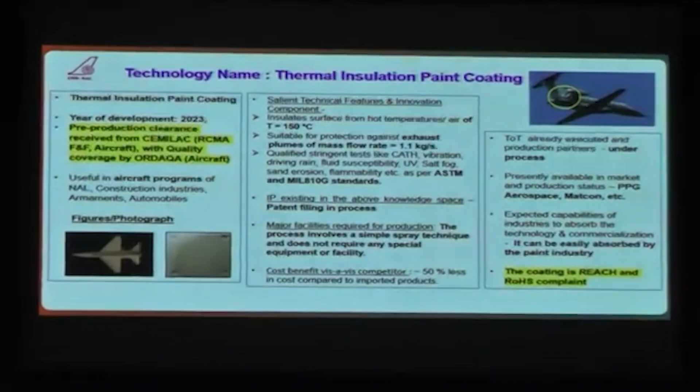Good afternoon, everyone. The technology I shall be discussing now is the thermal insulation paint coating technology. This paint coating technology, developed in 2023, caters to the aircraft's requirement, particularly for providing thermal protection and insulation on aircraft surfaces against impingement of hot air with high mass flow rates.

The motivation for carrying out this activity at CSIR NAL is the requirement in our own in-house program. Our CSIR NAL developed Saras aircraft had a similar issue of undesired heating at the rear fuselage areas, and to address this heating we had to develop a paint which was compatible with the existing paint layers. This paint suits temperatures up to 150 degrees centigrade against hot air of mass flow as high as 1.1 kg per second per stub.

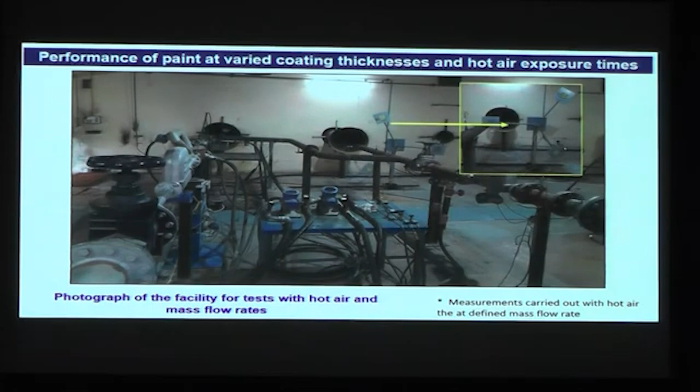The coatings were tested for intactness using C-scan technique, followed by testing for driving rain, salt fog, flammability, sand test, dust, cath, and contamination by 3 different kinds of fluids commonly encountered on aircraft. All these tests were carried out as per relevant military standards, RTCA and ASTM standards.

Further to this, the coatings were also tested for mechanical durability, for intactness towards vibration test and also pull-off adhesion test. Adhesion is a very, very important factor for these coatings on the aircraft to have long service life, so in the next slide I shall detail you a little on that.

Further, the coatings were also highly stable against thermal tests which were carried out, including thermal shock, thermal stability and thermal cycles up to greater than 8,000 cycles.

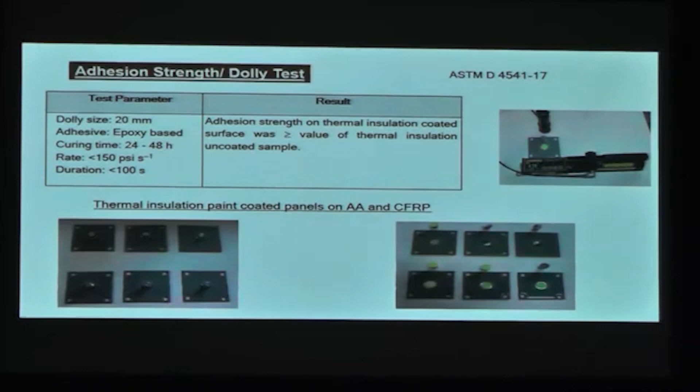The tests were carried out as per the standard, and it was seen that the adhesion strength of the coated samples was much higher than the regularly seen values for normal samples. So these coatings had very good pull-off strength compared to the regular coated samples.

All of the tests listed in the previous slide were carried out in NABL accredited laboratories and witnessed by inspectors from the certifying agencies.

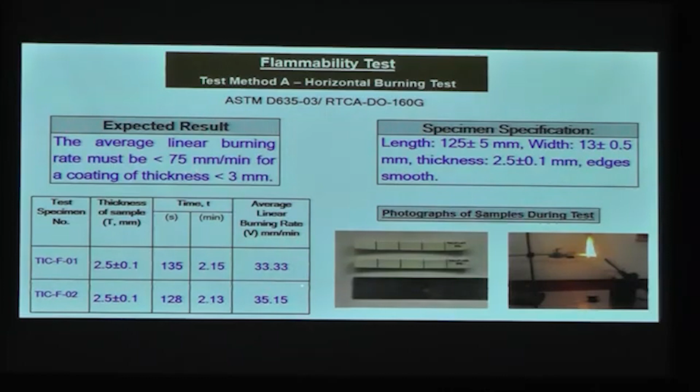This was also a very important test which we had to do, wherein we carried out the flammability test using the horizontal burning test method. As per the requirement, the coating had to have a linear burning rate less than 75 mm per minute, and we see that the developed coatings had almost half of what was actually required. Therefore, the coatings also qualified this test.

So the salient features of the thermal insulation paint in brief: this paint is suitable for applications providing thermal insulation against hot air for temperatures up to 150 to 180 degrees centigrade. The density of the coating is very low, about 0.85 gram per cc.

The paint is developed using locally available raw materials. The deposition technique is also very simple and doesn't need any sophisticated machineries. Hence, it can be easily adopted into the industries.

Since the method of deposition is a simple spray technique which can be carried out at room temperature, there is a lot of ease in controlling the coating thickness and also in deposition of the paint on complex shapes. Since it is a spray technique, it is also possible to carry out local repairs on site.

It is non-combustible with extremely low flame spread. It is suitable for metal, concrete and composite, because this paint has been proved on both aircraft grade aluminium alloys as well as carbon composites. The paint is compatible with epoxy as well as PU paint. No additional waterproofing is required, and it is resistant to regular wear and tear.

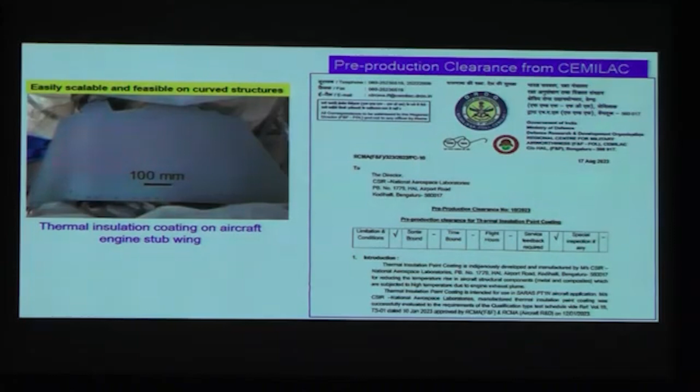The paint has been accorded pre-production clearance by CEMILAC in August 2023, and we have taken up activity to put it on the aircraft and see its behavior. This technology is available for TOT. Thank you.

This chromic acid anodization is conventionally used because of its high corrosion protection, and it has very good adhesion to the primer, and it leads to minimal reduction in fatigue strength. But unfortunately, the hexavalent chromium used in the development of this chromic acid anodization is highly carcinogenic and toxic, and it has to be phased out at the earliest.

According to one of the forecasts, a likely sunset date for this hexavalent chromium containing chromic acid anodization is 2026. So the need of the hour is to develop an alternative anodization process which will give performance equivalent to that of the conventional chromic acid anodization.

So people have been trying throughout the world, finding out a suitable alternative anodization. For example, sulfuric acid anodization, boric sulfuric acid anodization, or tartaric sulfuric acid anodization. These are the alternatives that have been envisaged. But most of the time, due to lack of enough corrosion protection, they are usually sealed with hexavalent chromium containing sealant, which is again undesirable.

Keeping that in mind, we have developed at NAL an alternative process, which is a modified tartaric sulfuric acid anodization, and we have sealed it with an eco-friendly chromate-free formulation. We have evaluated this alternative coating for a variety of tests. For example, it is qualified as per MIL-A-8625F, which is generally the standard used for the evaluation of even the chromic acid anodization.

First and foremost, it was tested for corrosion through conventional salt spray testing, evaluated per ASTM B117, and it qualifies for more than 2,000 hours, at par with conventional chromic acid anodization.

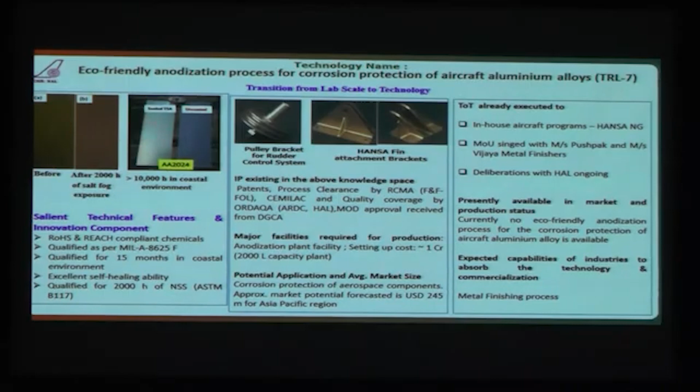The second eco-friendly technology I would be talking about is the zinc-nickel process. It has been developed as an alternative to cadmium. Cadmium coatings are generally used for corrosion protection of high-strength steels because of their excellent corrosion resistance, providing protection through sacrificial coating.

It has a very low coefficient of friction, meaning high lubricity, and does not result in any reduction in tensile or fatigue strength. But unfortunately, it is toxic and carcinogenic because we use cadmium in the process. There is also cyanide and hexavalent chromium in the process—all three entities are very carcinogenic and have to be limited.

So we have developed an alternative process, the zinc-nickel process, and it has been evaluated extensively as per AMS standards, with thickness in the range of 10 to 14 microns.

It has been evaluated for adhesion through the scratch test and the bend test. There is no peel off of the coating, and its compatibility with the primer and PU has been established.

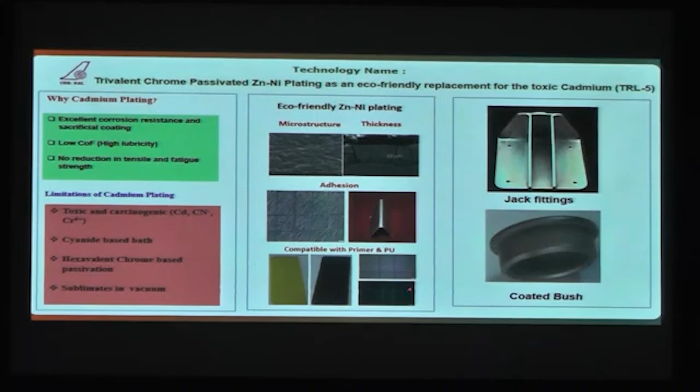This is the setup we have developed, a 500 liter facility for production of zinc-nickel coatings. These are some of the salient features: the thickness is in the range of 15 to 18 microns, and the corrosion resistance is more than 500 hours of salt spray without any red rust formation, as required by AMS 2417J.

Adhesion is excellent, evaluated as per this standard, and it has qualified for more than 200 hours of hydrogen embrittlement test, with lubricity comparable to cadmium.

We have obtained pre-production approval from RCMA CEMILAC very recently, and we are going for airworthiness certification next, which we'll likely get within about 6 months. The costing is at par with cadmium even for this zinc-nickel process.

Wherever high strength steels are used, we can use this for corrosion protection as a replacement for cadmium. Post airworthiness approval, the technology will potentially be transferred to the aerospace industry. If anyone is interested, they can take up this technology as an alternative for cadmium.

There are no technologies as such in India currently as a replacement for cadmium—it's one of a kind. I strongly believe this can completely eliminate cadmium in corrosion protection applications. Thank you.

As you see, the gas turbine engines have different temperature zones, ranging from 300 to 400 degrees at the inlet to up to 1200 degrees centigrade at the outlet. So we have developed different coatings for different components, such as thermal barrier coatings for turbine engines, environmental barrier coatings for composite components, and erosion resistance coatings mainly for compressor components.

We have various IP patents in this area. The salient features are these TBCs are compatible for high working temperatures of 1100 to 1200 degree centigrade, and you can achieve up to a 120 degree centigrade temperature drop so as to protect the bare metal from the very hot zone. It has very good thermal durability and low erosion rate.

Our EBC coating, that is environmental barrier coating, meant for composite components, has moisture resistance and also very good thermal durability. The other coating is erosion resistant coating for our compressor blades.

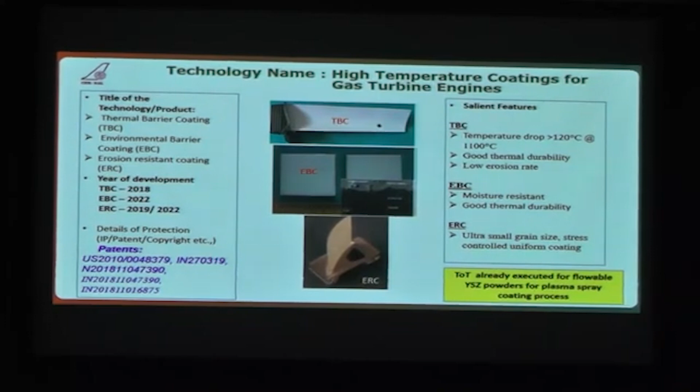These are all made by sputter coating techniques, which give a very good ultra small grain size, stress controlled uniform coatings, with both ductile and brittle balanced nature. We have also transferred technology based on this.

For plasma spray coatings, whatever powder is required has to be flowable. We have made those flowable powders by our own indigenous process, spray drying, and this process has been patented and also transferred to industry.

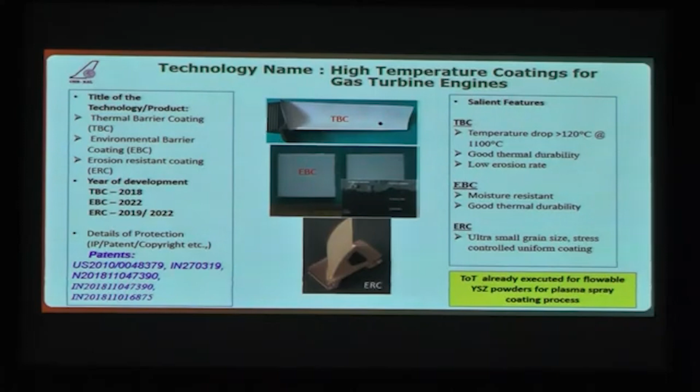As you are aware, in gas turbines there are many degradation issues in the typical components, ranging from hot corrosion, erosion, and CMAS attack. The CMAS attack is like volcanic ash, consisting of calcium, magnesium, aluminosilicates, which can react with these components and degrade your turbine blade components.

These gas turbines have a range of temperature zones, from 350 to 400 degrees centigrade up to 1200 degrees centigrade. So we are developing different types of coatings for these components, one among them being the thermal barrier coating.

Our basic strength is that we have all the inherent requirements for the coating process, like plasma spray facilities and sputter coating facilities. We have state-of-the-art characterization facilities for these coatings, like thermal cycling, and there is a unique facility which you can find only at NAL, like this combustor rig test facility, where you can test these coatings in typical gas turbine conditions with simulated mass flow and pressure conditions.

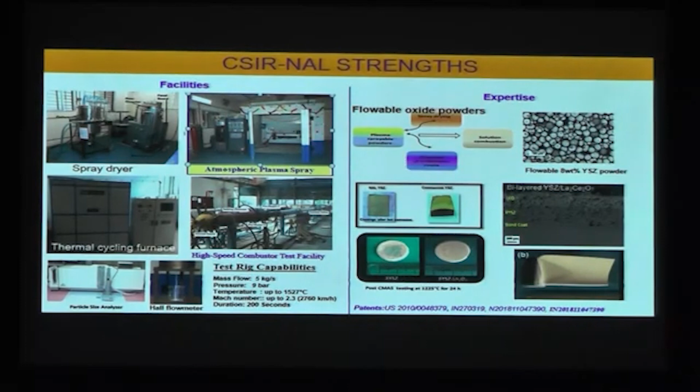These coatings are tested for typical aerospace conditions and undergo all sorts of stringent testing in our test rig. We have made a wide range of thermal barrier compositions, ranging from doped yttria stabilized zirconia, ytterbium doped zirconiates, and Gadolinium pyrochlore, among others.

The uniqueness of these coatings is that they have very low thermal conductivity, which is one of the important properties for thermal barrier coatings. It's worth mentioning our thermal conductivity is in the range of 0.5 to 1 watt per meter Kelvin, whereas commercial YSZ coatings are about 2 watts per meter Kelvin. We have tested for thermal cycling and have achieved more than 100 thermal cycles in these coatings, and our erosion rates are one order of magnitude lower than commercial coatings.

The other one is environmental barrier coatings. In next gen engines, people are also using SiC composite components in aircraft engines. This requires a different type of coating, because the corrosion problem is altogether different compared to metal-based components. At high temperature, in the presence of water gas, this SiC matrix will degrade over time by hydrolysis. Further, a different type of coating has evolved.

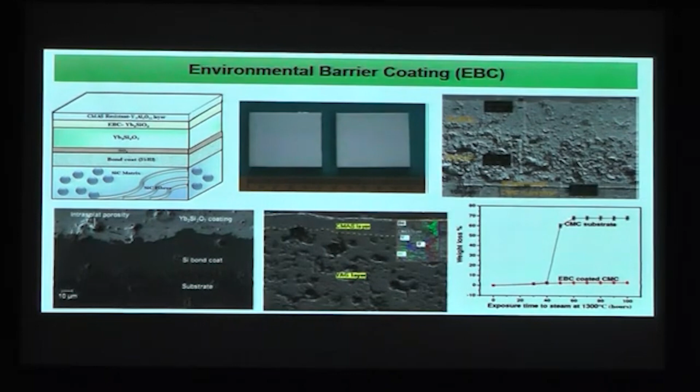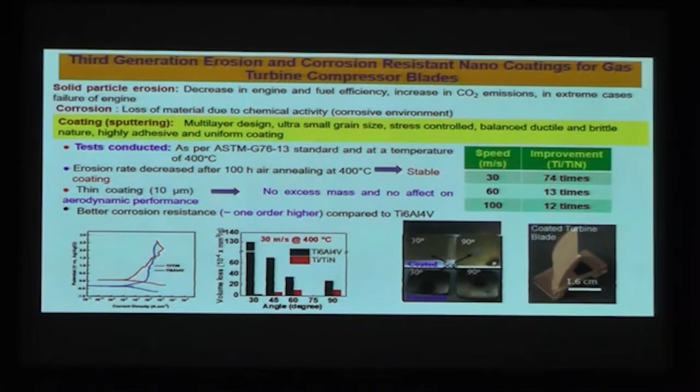Further to that, we have also come out with nanoporous based coatings. The uniqueness of this coating is that it can absorb the erodent energy to some extent, and by that way it improves erosion resistance. In this case, we have realized about 18 times higher erosion resistance than the bare titanium alloy substrates. So with this, these coatings have the ability to withstand high temperature, erosion resistance, and corrosion resistance.

Not only in aerospace applications, it can also be used for many industrial and automobile applications. For example, this same plasma spray coating process has been used for our fuel cell coatings, that is for coating the spinel oxide on metallic substrates, on a stainless steel substrate, where the requirement is slightly different. So what I want to mention here is this is not just aerospace, it has many applications. If any industrial partners come forward, we are ready to customize these coatings as per their requirement.

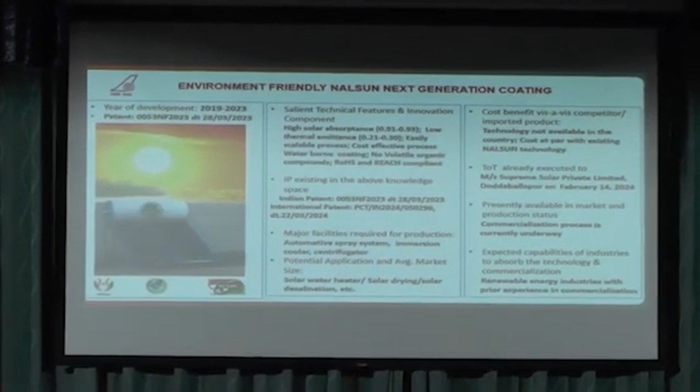Let me start with a brief introduction on why we have developed this environmentally friendly NALSUN next generation coating technology for solar water heater applications. In the late 1980s, NAL developed NALSUN spectrally selective coating for solar water heater applications, and the technology has been transferred to 29 industries. However, this coating is an electrodeposited black chrome coating, and it contains hexavalent chrome, which is carcinogenic, and its disposal is a challenge. Hence many industries approached us to develop an eco-friendly and easily scalable coating technology, which at the time was not available in the country.

Towards this, we developed this NALSUN next generation coating technology, which is cost effective, easily scalable, and the major advantage is that it is completely environmentally friendly. During the period of 2019 to 2023, we developed this coating, and the major advantage is that it has very high solar absorptance and very low thermal emittance, meaning it can absorb solar energy and convert it into thermal energy at a very high rate. One of the major advantages is that we have not used any volatile organic compounds, and it is completely environmentally friendly, and it is ROHS and REACH compliant. The coating concept has been protected under an Indian patent and also an international patent, and a trademark is filed under the name NALSUN NG.

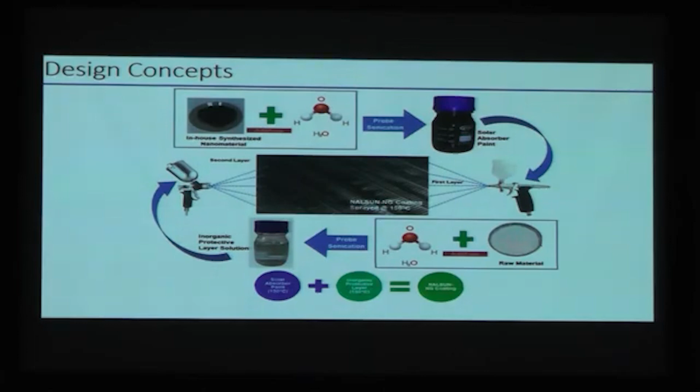With these spectrally selective coatings, we achieved absorptance of almost 93% and emittance in the range of 30%. The coating also has very high thermal stability up to 175 degrees Celsius for 600 hours, and the optical properties of these coatings almost match our existing NALSUN coating technology.

To utilize this coating for practical applications, it has to qualify various environmental tests, including humidity test, condensation, and corrosion resistance tests. All these tests were carried out under ASTM and International Energy Agency standards. We have tested these coatings at NABL accredited labs, third-party agencies, who have evaluated and provided the certificate.

The two major tests are the ROHS test and the REACH test. These two tests give you an idea whether any hazardous chemicals are present in your coating. This test has been done at TUV Rheinland, and they have provided that the coatings are ROHS and REACH compliant. The ROHS test clearly shows that there are no heavy metals, phenyl compounds, or phthalates present in the coating.

The REACH test is very crucial, having 223 substances of very high concern. Even if you are simply using acetone in the coating, it will not qualify the REACH test. This clearly shows that we have mainly used all inorganic materials to get this technology.

As I mentioned before, we have used mainly water as a solvent, so this coating has qualified the VOC test. For the corrosion resistant test, which mainly uses sulfur dioxide gas, this test facility is not available in the country. So we sent the samples to TUV Rheinland, Germany, and the coating has qualified this test.

The major test is the conversion efficiency test, which measures how much our coating is absorbing the solar energy and converting it into thermal energy. To do this test, we prepared a solar water heater panel with the help of private industries, and this panel was sent to Regional Solar Energy Testing Center, Madurai. They tested this coating for almost 2 months and provided a certificate.

That is pointer. Yeah, okay. Good afternoon to one and all present here. So now I'm going to give a brief presentation on two technologies.

One is basically the continuous fiber reinforced ceramic matrix composites through CVI technology, chemical vapor infiltration technology. It is one of the gas phase processes where we can convert the preform into a final product for various applications. The salient feature of this technology is that the temperature and pressure involved is very low, so it doesn't damage your reinforcement. And the reinforcement can be anything, like carbon fiber.

I think my friend Dr. Tarun is going to address that. We can also use the silicon carbide fiber or oxide fiber, so any fiber can work as a reinforcement. And at low temperature itself, I can get the phase which we wanted in the CVI. Another thing is their strength-to-weight ratio is very good.

Because of the low density and high Young's modulus. So the products which we have already made using this CVI technology, you can see here.

The centermost is the aircraft brake disc application, where we take carbon fiber as reinforcement and process it through CVI, and finally we get the product. Similarly, a lot of gas turbine engine based applications, gas turbine exit nozzle side, especially the convergent flap sleeve, and also some applications like hypersonic cruise missile applications, especially the wing leading edge and nose tip and so on.

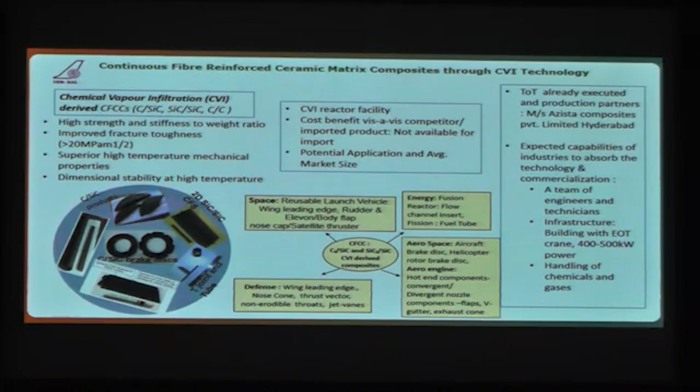So CVI is nothing but a chemical vapor infiltration process, where we bring gaseous reactants and allow them to infiltrate the heated porous preform and react at high temperature and low pressure, forming a refractory solid. If you keep doing this, the whole porous preform will be converted into a tough composite.

Typically about 300 to 400 hours of infiltration is required to get almost 88 to 90% of theoretical density.

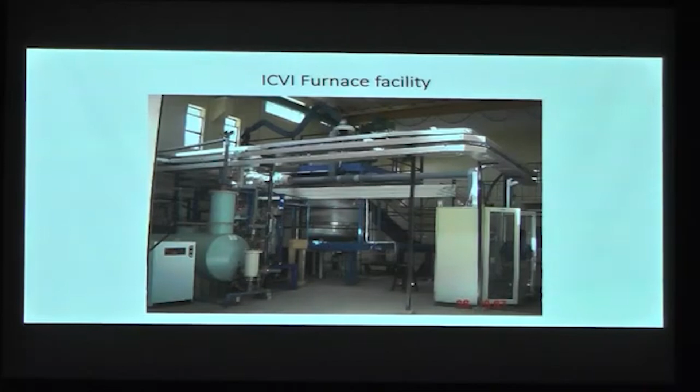First we go for the interface coating by cracking methane, which gives pyrolytic carbon. In some cases boron nitride can also be used, where BCl3 and ammonia react to form boron nitride. Finally the matrix CVI is done by taking methyl trichlorosilane, which is decomposed at high temperature to get silicon carbide.

So this is with respect to the first technology. These are all the components which we have developed.

The second technology - so far whatever I explained, the CVI, it is a time consuming process, 300, 400 hours. So now how to reduce the time? To reduce the time, we have taken up a process called the hybrid process, where we want to complement CVI with other processes like polymer impregnation and pyrolysis, and also liquid silicon infiltration process. Thereby we can reduce the processing time by something like 40% to 50%. So that is how we have taken up this project.

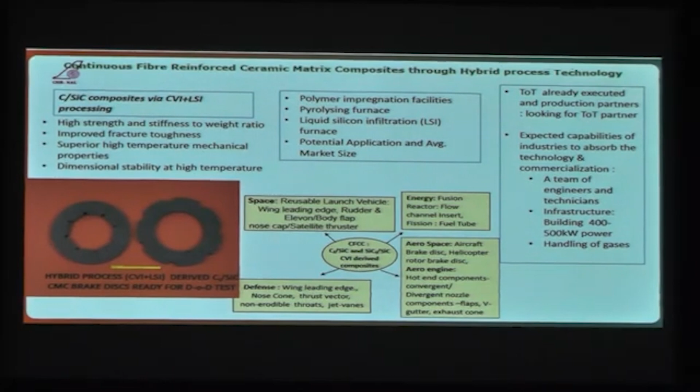Application wise is the same, and the company should have the furnace and also polymer impregnation facilities, like RTM or vacuum bagging technique. So any polymer composite, that is one intermediate step, they should have it. And of course they should also have the binder pyrolysing furnace, and also liquid silicon infiltration. Application is the same, it finds everything.

So you all know the brake disc, starting from metal to CC, carbon-carbon composite. Now recently, 4 or 5 years back, the consortium met by the international community, where the Aircraft Brake Disc Manufacturers Association declared that C-SiC composite is the next generation aircraft brake disc material, like a fourth gen material.

So the advantage compared to CC is very good. Almost all commercial aircraft today is flying with carbon-carbon, no problem. But there are some disadvantages, like instability in friction performance, the coefficient of friction, and also the proneness to oxidation. Since the matrix is carbon, the friction dissipates more energy, and if it becomes more than 500, 600 degrees centigrade, the carbon will oxidize. So that is a drawback.

Whereas if you replace that carbon matrix by silicon carbide matrix, then you get a lot of advantages, starting from high friction coefficient, stable friction coefficient, high temperature capability because you have a silicon carbide matrix, and so on and so forth. Of course, the disadvantage is it is expensive.

So this is the SARAS aircraft, our own SARAS aircraft brake disc. Currently it is made up of metallic brakes, copper based alloy with aluminosilicate alloy, kind of an MMC, but they have got their own disadvantage: excessive heating, and also a lot of debris coming if they apply frequent braking.

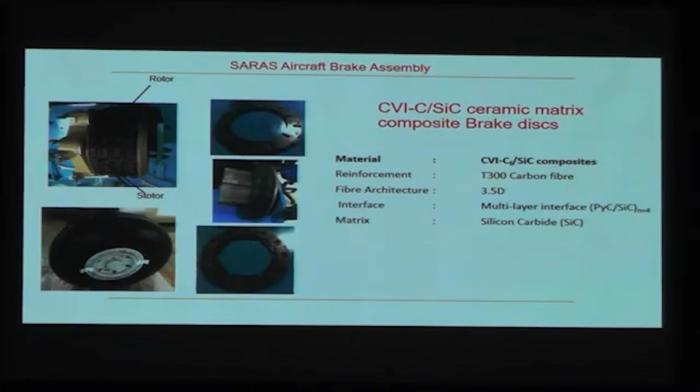And you all know that the CMC can be made by these three processes. One is the CVI, which I just explained. The second one is you take the polymer, which can be impregnated into the porous preform, and then cured and post-cured, then pyrolyzed, and I get the carbon. If I take the phenol formaldehyde, I get carbon as a matrix, and keep doing this, finally I get the product. So this is the PIP process.

The third one is the liquid silicon infiltration process, where my starting raw material is, say for example, carbon-carbon composite, which is porous in nature. That is taken for LSI treatment, where silicon is kept along with it by calculating the stoichiometric ratio, so that the available carbon will react with the silicon and form silicon carbide. So thereby I reduce the time.

So I use all the three. In my hybrid process, I use the first one for interface coating, the second one for getting the carbon-carbon porous matrix, and the third one for the final process, the final composite.

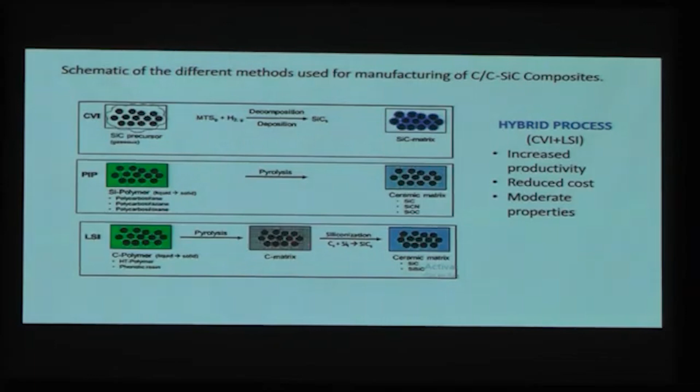So here, first I took the preform, go for polymer impregnation, pyrolysis, again impregnation, pyrolysis, like that I do it for 5-6 times. Then I take it for LSI treatment, and finally my composite is ready.

So this is a facility available at NAL, recently established under a mission mode program, where this can go up to 1800 degrees centigrade and 1 to 300 millibar capability. Depending on that, you can play with that. So this facility is used for making this brake disc.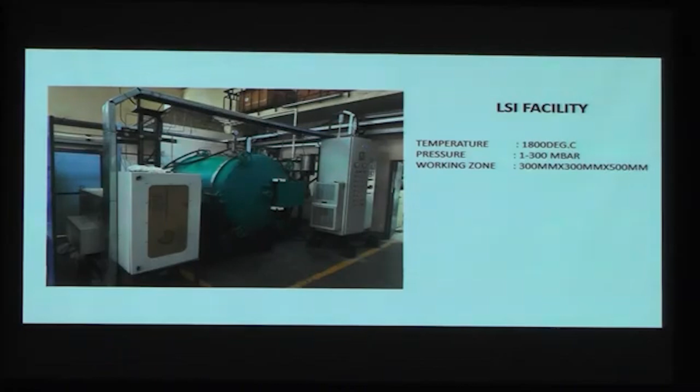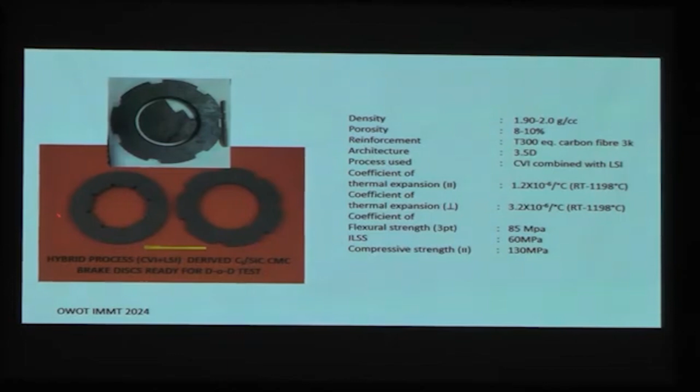I think my friend Dr. TPD Rajan is there from NIIST, Trivandrum. He knows that the qualification is a very tough process here. First we have to go for a disc-on-disc dynamometer test, and you have to qualify. Then it has to go for the assembly level test, where the assembly level is a full-fledged brake disc along with the aircraft wheel. Once that is also proved, then we have to go for the taxi trial. So we are at the DOD level right now.

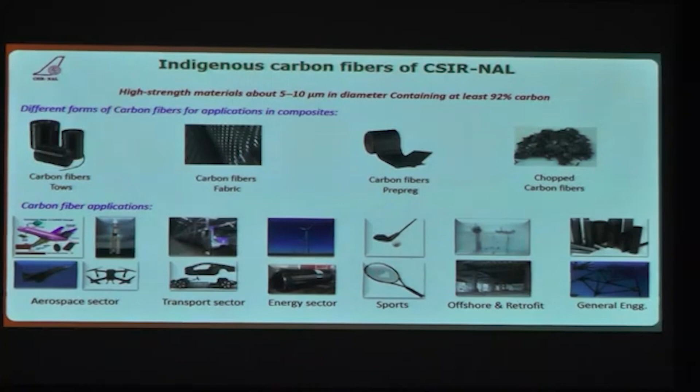Here at NAL, this is about the carbon fiber facility, and we have an integrated facility, basically starting from its starting material acrylonitrile, polymerization to fiber to carbon fiber. It has three major processes. The first is the acrylonitrile polymer, where suspension polymerization process is used, and the polymer is produced in a continuous reactor. We get a polymer powder from this reactor that will be dissolved and made into a solution, then spun through wet spinning technology.

This is a pilot plant facility, which has an industrial kind of setup. Your data is directly scalable - scalable data we can get from here. It is equipped with all the related process utilities and process controls. Characterization is also done in-house in this facility.

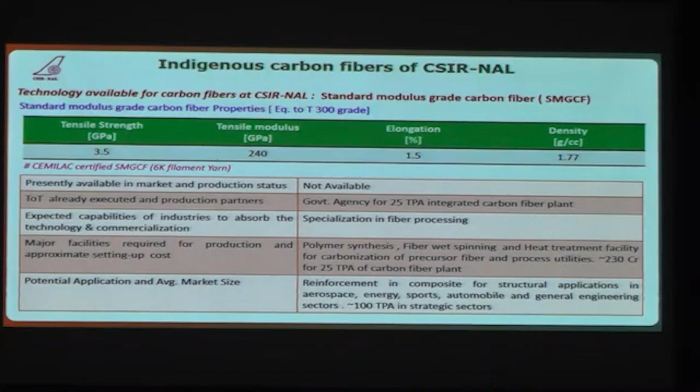Thank you very much for your detailed presentation on carbon fiber technology at NAL. Do you have any queries for the speaker? Yes, can you hand over the mic there?

Thank you, sir. Is there any readily available supply chain for this particular material?

Readily available, in the sense the market currently is looking into indigenous content. This is an Indian factory. Yeah, these fibers are available in market. It's not that it's not available, but it's not easily available. There are several grades, and you may not get the proper grade either. So that problem exists even in the international market.

So as an indigenous industry, is there any way we can get this in order to improve our percentage for this product? Yeah, I mean, fiber is available, but it's not Indian origin. So is there any factory already producing it of Indian origin from this process?

I told you, one technology has already been transferred. We are expecting this product in another 1 or 2 years, but still it's not sufficient to cater to the demand of the Indian market. So a lot of potential is still there. Around 100 tons is what we have estimated from various sources, so immediate requirement is there. In future, when this goes for lower end applications, like general engineering or automobile sector, demand is going to increase. So far we don't have the option to buy that readily.

Good afternoon everyone, and welcome to this session on AI-enabled technologies and systems coordinated by CSIR 4PI. We are gathered here to explore the transformative potential of AI across various domains and how it is shaping the future of research and innovation within the CSIR network and beyond.

We are privileged to start our session with insights from Dr. Sridevi Jade, Director of CSIR 4PI. As a leading force behind AI initiatives within CSIR, her perspective will set the stage for our discussions today.

Good afternoon to one and all. As the Director of CSIR 4th Paradigm Institute, since this is a session coordinated by CSIR 4PI as part of the One Week One Theme initiative event, the AEISS theme of CSIR NAL, as per this we are supposed to contribute. Since we are the only data science lab of CSIR, we are horizontal across all themes. So for each One Week One Theme event of each theme, we are supposed to conduct some program. Since NAL was conducting here, we thought we would coordinate one session under this theme as part of our contribution. That is how we are here today.

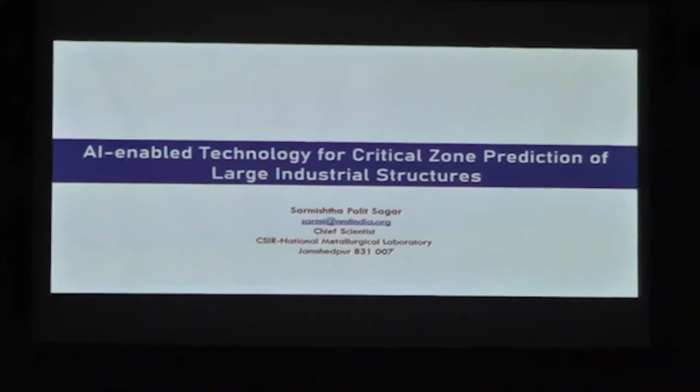I'll give two case studies, but I'm sure this can be applied to any such structure which is refractory lined. Before going to my own work, this is next-gen manufacturing industry, and while not everything I'm going to talk about, we know how important each part is to make a next-gen manufacturing industry. Each and every item is important.

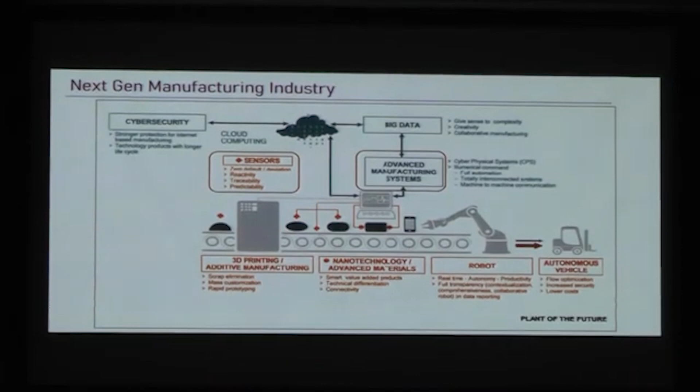Why did I mark sensor and this other part? Because these are the things I'm going to address. There is big data always associated with that, and that analysis and cloud computing is naturally an integral part of it. So with that I'm coming to an integrated steel plant, how it is, and though we have addressed many of the issues, only two things I am going to show.

One is in the blast furnace area, and one is called the pellet plant, which is the pelletization of raw material that can be put into the blast furnace. All of us know the blast furnace is the heart of the steel industry.

When we talk about AI, big data analysis, even for human beings or anywhere, the most important part is the sensor, because you need to collect the data - our neuron, our brain itself. If we don't collect the data here, we cannot do anything. That means the most important part is the sensor, which gives us the data.

Lots of work is required on sensors, different types of sensors in different applications, whether biomedical, manufacturing industry, or healthcare. Wherever you go, you need lots of sensors, and lots of work is required for application-based sensors. Then you need lots of work on the structural analysis of the sensor, where it is going to be used, what type of calibration is required.

When I'm talking about data capture, AI, fully automated systems, the sensor has to be embedded on the body - you cannot go and do the work by placing the sensor at that location. Then it comes to predictive diagnosis and prognosis, that is data processing and interpretation, data mining to segregate false and real data, because when we capture data, there are a large number of data which are false also. That means you need to segregate the data.

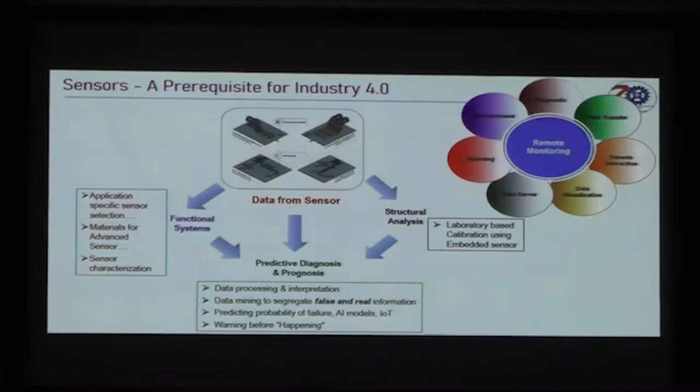Then predicting probability of failure, using AI models, IoT, and giving warning before it happens, or giving information about what's going to happen in future. So all these are included here.

So now, exactly in that way, I'm giving you one example here. It's the blowpipe, how it is arranged in the blast furnace. You can see what a complicated structure this is. One blast furnace has 34 such blowpipes, and the inside portion, which is going in, is the most important - and that means it is not accessible. You can't access that area to place your thermal camera and get temperature monitoring. The challenge is the temperature is 1200 degrees centigrade, with hot air blowing through it.

Dimension of the structure, inaccessibility, unpredictable failure - we don't know which blowpipe is going to fail. So it is very, very important to have this predictive type of model for each blast furnace, and prediction of the correct one prone to failure, that you have to find out, so that they can take proper action and only that blowpipe can be replaced.

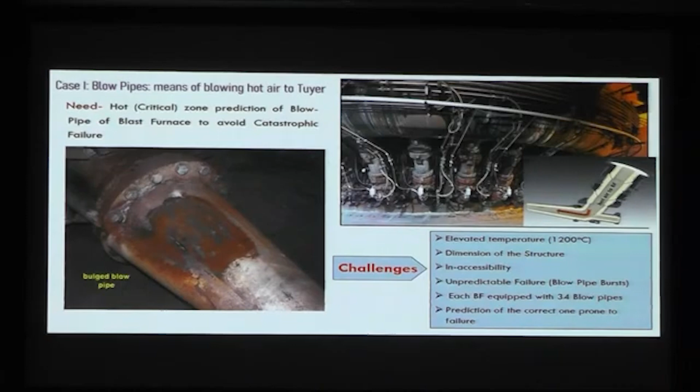And what happens, you can see, if it cracks, that 1200 degree air comes out. So what type of threat is it giving? Not only catastrophic failure with production stopped, meaning economical loss, but there can be a casualty. So safety is also a big threat.

So this is the adopted methodology we have taken - that means, in this case, how we have approached developing this type of model.

The first thing done was with the operational parameter, which was used to build this CHT model. From that CHT model, we generated a large number of data to get the thermal profile. Then from that large number of data, we developed the ANN model, starting from the heat transfer model: if there is a hotspot, how the temperature is distributed. The thermal spot was moved across 320 locations, the thermal profile was generated, and this ANN system was developed.

With that, we needed some sensors to be placed. We placed only 4 arrays of sensors - 1, 2, 3, 4 - with one array having 5 sensors. Those are fiber Bragg grating sensors, which we used here. Then this predictive model was developed.

Real-time data was collected continuously from November 2022 till the end of 2023. Using that real data, the system was retrained, and after retraining the error range came to plus minus 4 degrees.

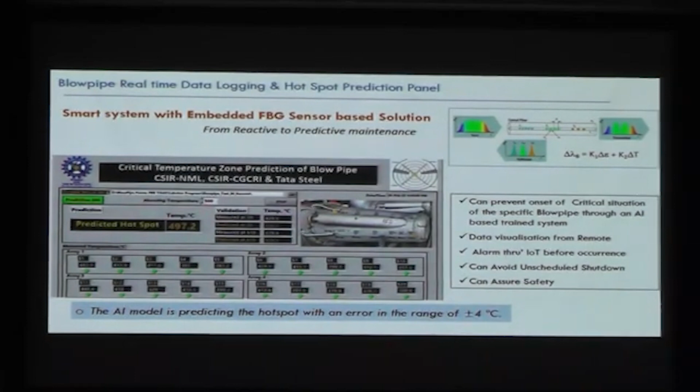Now the question may come: how will you know that the hotspot prediction is correct? That means you need a validation point also. So two points were kept as validation points where sensors were placed, but they were not taken into the model for prediction. The predicted value and the measured value were continuously compared, and that value came down to plus minus 4 degrees. This has helped prevent the onset of critical conditions.

We have done this for one blowpipe, but if we can continuously apply this to all 34 blowpipes, and the whole data can be captured and analyzed, a particular blowpipe failure can be detected before it happens. That is the big work, and that can be our next step of this journey.

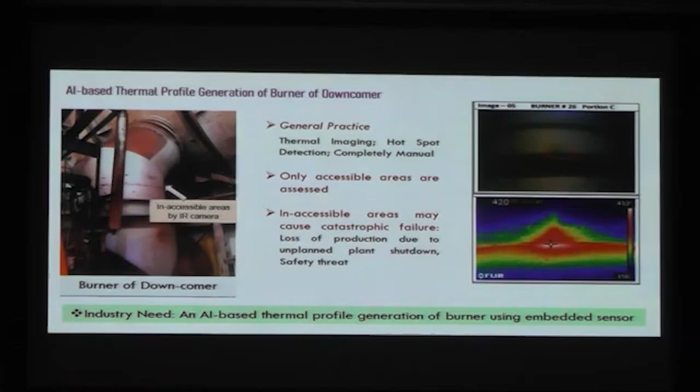In this case, most of the area is very visible, though it may be at a height of 20 or 50 feet, but still accessible, so a thermal camera can capture it. But what happens to the inaccessible area? Nothing can be done. So the industry needed an AI-based thermal profile generation of the burner by embedding a very small number of sensors, because if I put a large number of sensors, the cost will go high, the ROI will be very low, and industry will not take it up.

So here also we used fiber Bragg grating. I must appreciate CGCRI here, because this is one very good work we are doing with industry collaboration, with CGCRI, and our own indigenous system - everything is ours, our sensor, our indigenous CSIR product, our technology is our CSIR product, nothing is imported other than the fiber itself.

Here the thermal image helped us develop the AI model, because in the previous case we had the operational parameter. Here we didn't have any operational parameter - they could not give it to us. So ultimately we had to go based on the thermal image.

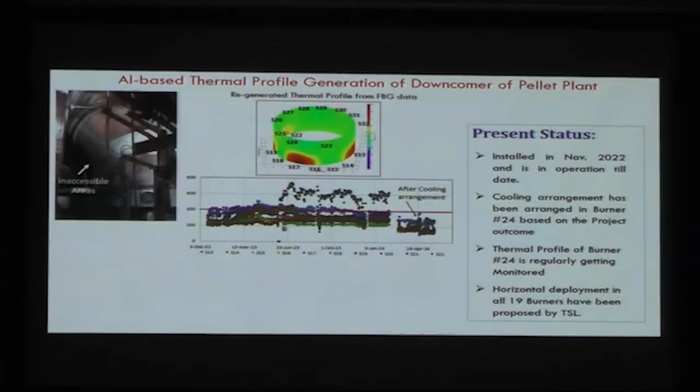What we observed: look, this is the backside, sensor number 21, and the temperature was continuously increasing, going up to 700. That means it was continuously giving an alarm which was not detected by the thermography, but this data showed it. What precaution was taken? Immediately a cool airflow arrangement was made - this is in July 2023, and this is March 2024 when they did the cooling arrangement.

The cooling arrangement was done on the 2nd of March, and the temperature dropped. That means it helped that burner, because it was an instrumented burner and the whole thermal image was ported to their control room. They could take this preventive measure, and that's why the temperature dropped and the failure could be prevented.

So what is the present status? We installed this in November 2022. It is still operating, cooling arrangement done, and now based on this, they want to deploy it horizontally in all 19 burners. When we deploy horizontally, we have to make some phase-shift arrangement where you can continuously monitor the data and only give an alarm for the critical point. So the large number of data is now increasing in multiples - now it is multiplied by 20.

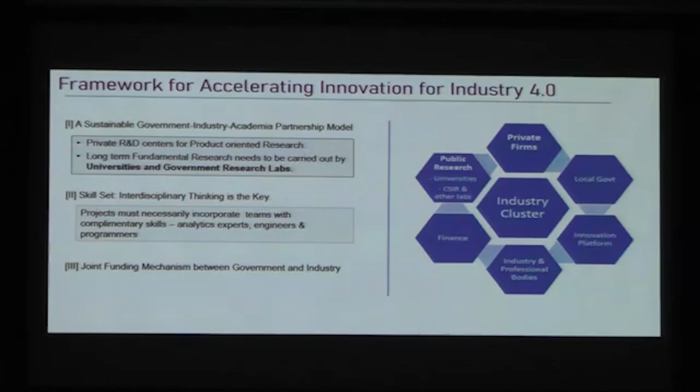Maybe this can come to your question. I actually thought of giving some framework required for accelerating innovation. Ashapurna, this can go to your answer when you are asking the question to the panelist, but I can finish with this: AI and Industry 4.0 has moved from being a popular catchphrase to something that is reshaping the way things are made, reshaping our daily life also. So with that, thank you very much.

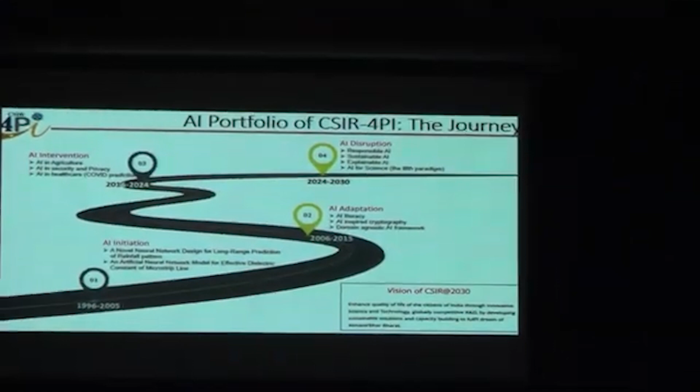I'll start with the AI portfolio of CSIR 4PI, the journey that we went across. Though we became a fourth paradigm institute in 2013, the activities in AI actually started quite long back. In fact, my PhD itself in 1997 was using AI. One of our scientists who was doing weather prediction using AI also got the Bhatnagar Award for this work. So we started way back in 1996 to 2005, which was an AI initiation phase.

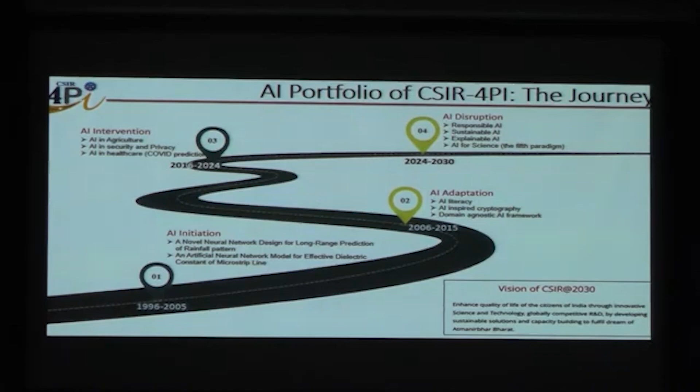Then later, we moved into the AI adaptation mode, where we started learning AI more and more. We began looking at something called AI in cryptography, since that was my subject at the time, and worked on neural cryptography. Then we started working on domain agnostic AI, the idea being to develop tools and techniques that are not specific to a particular domain, but can be used across multiple domains. That is the way we worked towards till 2015.

In 2016 to 2024, we started looking at the intervention of AI into various fields like agriculture, security and privacy, and AI in healthcare. Security and privacy is something we worked on in the first phase of this AI initiative. Currently, we are looking at AI as a disruptive thing, we want sustainable AI, responsible AI, and explainable AI. We are trying to move into an era where people can actually believe AI.

Right now it is a black box. People don't know how it happened, how the input has gone, how the output has come, but we need to have explainable things, and that is what we are trying to do. It completely aligns with the vision of CSIR at 2030.

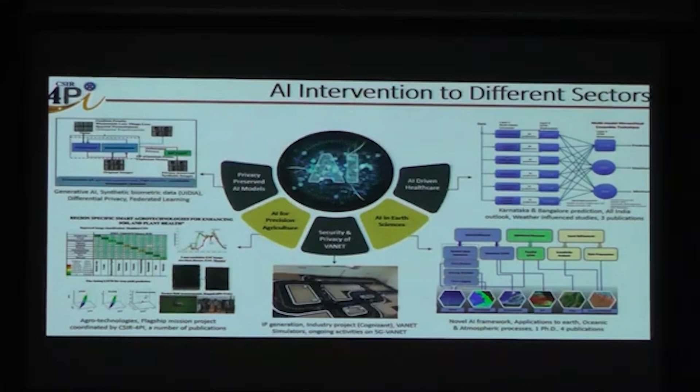So we started looking at where all we contribute in the sustainable development goals. To our surprise, we are actually contributing to almost 9 sustainable development goals, and for every goal we are looking at AI interventions. Whether it is agriculture, energy sector, climate modeling, whatever you look at, everywhere we are looking at AI as an intervention and working towards that.

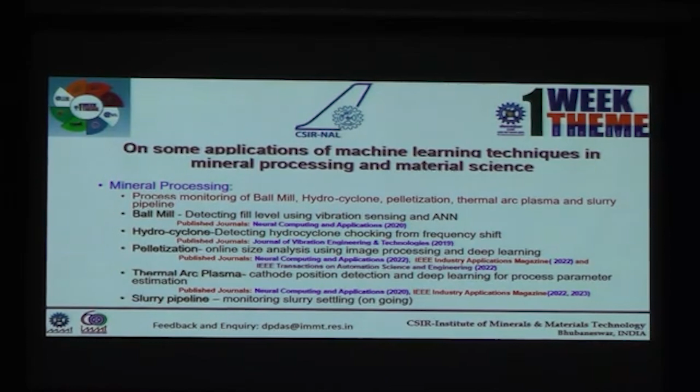Our division is related to instrumentation and process control. We develop different types of instrumentation for mineral processing, and we also work a bit for material scientists, helping them do lesser experimentation and generating experimental data, predicting futuristic experimental data using AI/ML techniques. I have only two slides because I wanted to not spend too much time on the presentation.

In mineral processing, there are different unit operations, like the ball mill, used for grinding. It's a big metallic cylindrical structure with balls inside, used for grinding ores to finer size. But from outside, you cannot know the fill level of the mill, whether it's half full, optimally filled, or more than required.

Using vibration sensors and machine learning technique, we can predict the fill level of the mill. We can also predict other information about the inside of the mill, like the condition of the ball, the condition of the material, whether the ball is coated with moist material so that a cushioning effect occurs and grinding is not proper. All this is going on in our lab. Some publications are mentioned there, so details can be found from there.

Then hydrocyclone is another process, in which heavier materials are separated from lighter ones based on density using a cyclonic process, a unit operation. But there is a possibility that the hydrocyclone may choke during operation. Once it gets choked, there will be huge trouble and they have to open and clean the hydrocyclone.

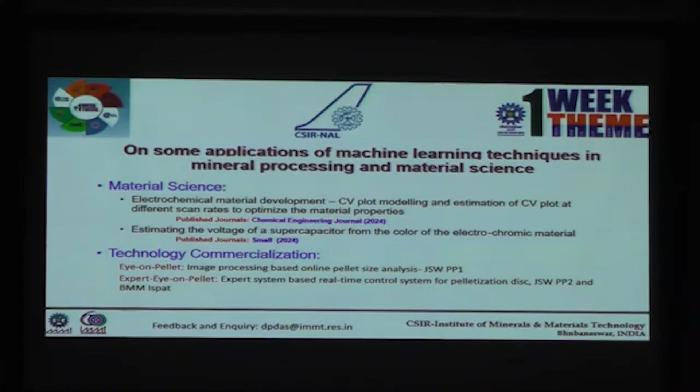Hello, very good evening to everyone, and I would like to thank the organizers for inviting us here to introduce the AI-related work we are doing in our lab. I am from CSIR CEERI Pilani. We are actually at a very remote place in Pilani, not very well connected to cities, unlike Bhubaneswar or Bangalore that ma'am mentioned. So we are in sort of a town, and industrial interaction is very limited.

As ma'am mentioned, CSIR has been executing an AI mission mode project, and we have been the coordinating lab for both missions. During the first phase of the AI mission, we established an AI computing facility, a 5 petaflops GPU facility for AI deep learning training, using NVIDIA DGX systems. Recently we upgraded it, and also added an inferencing cluster with P40 GPUs, so we have a cluster of GPUs for AI/ML model training as well as inferencing, along with a 100 TB storage facility. This facility is used by our different CSIR sister laboratories for training and testing of the DL algorithms proposed during the AI mission, and it is also available for universities and industries who want to use it on a charge basis.

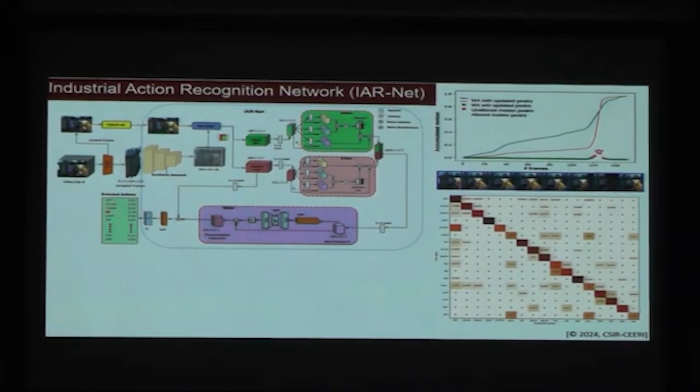Next, we further improved the architecture and included human-object interaction. We should know which tool the person is working on. Earlier we worked only with the lathe machine, but this could be applicable for other tools also.

The other project we are working on is a human drowsiness detection system, for drivers and industrial workers. As we know, one of our sister labs, CRRI, conducted a survey in which they found that 40% of road accidents are due to dozing off at the wheel on the 300-kilometer Agra-Lucknow expressway.

This project aims to address the issue of monitoring and detection of drowsy driver behavior, and we used physiological as well as behavioral methods. Behavioral methods include monitoring driver facial features, and physiological methods monitor the driver's ECG signal attached to the steering wheel.

An ECG sensor was used to capture the ECG signal and estimate the heart rate of the driver during normal and drowsy states, as well as a camera that captured behavioral measures using eye blink, yawn, eye state, and so on.

We designed our own architecture for eye state detection—whether the driver's eye is open or closed—as well as mouth yawn detection and blink detection. These algorithms were implemented on the Intel OpenVINO tool. This is just a 10K device, used with a Pi board and a camera. So this is the demo.

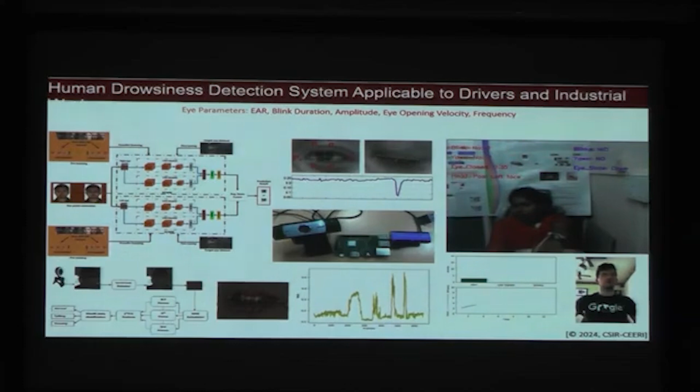So we experimented with the simulator, but now we are testing the system in a real environment by installing it on a driver—taxis and buses on the Bangalore-Chennai expressway. This data was earlier collected using a simulator; now we are collecting real world data.

Finally, we also worked on power line infrastructure monitoring, where we aim to detect different power line components and identify faults or anomalies if present. This project was done with CSIR-NAL.

They decided the SOP and helped in collecting the power line data set across different power line companies across the country. Our task was to develop deep learning algorithms to detect different components and analyze faults in that. Monitoring power line infrastructure is very essential to prevent complete blackout, which leads to lots of losses to industries.

So we thought of using the power of UAVs as well as AI to regularly monitor the power line infrastructure, so that we could do predictive maintenance and prevent those blackouts and losses to industries.

Okay, so my first question to Dr. Devi Prasad. How is CSIR facilitating the adaptation and integration of AI technologies within industry in India?

Thank you for the question. First of all, the advantage of CSIR is that it's a multidisciplinary organization, starting from leather to ceramic to minerals to medicinal plants - all domains we have expertise in. Each and every lab has some computer scientists, AI experts, and on top of that we have 4PI having complete expertise in data science. There are labs like CEERI Pilani having a lot of expertise in electronics.

Therefore, any type of problem to be solved using AI - artificial intelligence is like human intelligence. There are some intelligent persons and some who are not so intelligent. There are employees who are very intelligent and employees who are not so intelligent. But all organizations require intelligent people for their work to be done. Similarly, since we have a lot of domain expertise and facilities, any kind of challenging problem can be converted into an AI-based solution.

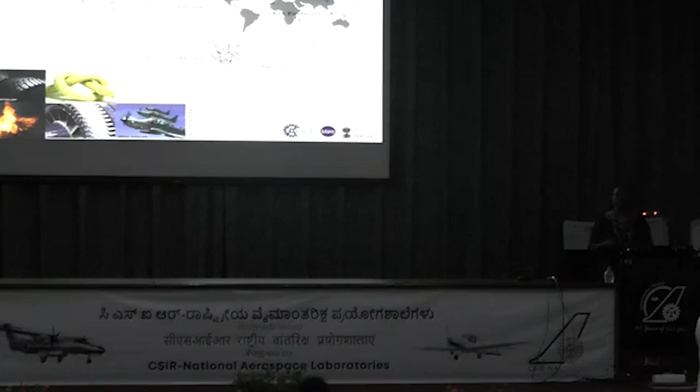So what are aramids? Aramids are aromatic amides, synthetic fibers having a rigid structure with very good tensile strength and thermal properties. There are two classes of aramids: para and meta aramids. The para aramid has benzene and amide bonds in a 1,4 connection, which gives it a rigid structure, and that gives it high thermal strength and tensile properties—it is as strong as steel. Whereas in the meta form, the connection is a 1,3 linkage, giving a kinked structure, so it does not have as much strength as the para ones.

Because of their high properties, especially the para one, these materials can go into bulletproof applications—they can absorb and dissipate impact. Because of its lightweight nature and high thermal and tensile properties, it also goes into aerospace applications. On the other hand, the meta aramid goes into fire retardant applications. And there are only a couple of countries where this is developed.

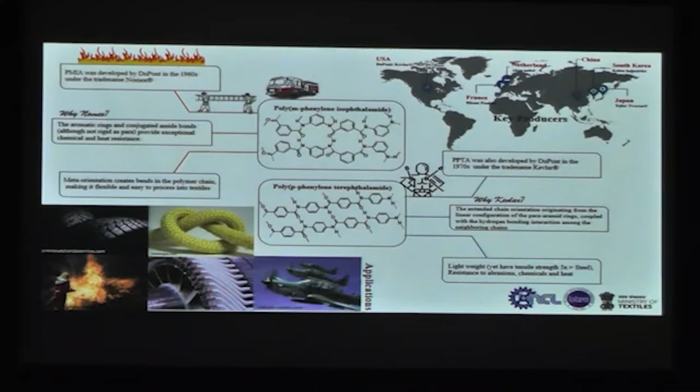Historically, aramids were first introduced by DuPont in the 1960s. Then the Netherlands, AkzoNobel, and now Japan, France, and China. These are the only countries that develop these materials. And in India, actually, we are one among the top 3 importers of this material.

And in India, the market is growing at a rate of 10% CAGR, and we are importing the entire thing. We do not produce this in India at all.

So it involves the lab scale synthesis of the material, then the fiber spinning, and then the scale up and applications. Actually, our visit here to NAL has been very fruitful.

We saw the carbon facilities today, and we came to know that about 20-25 years back, NAL had also developed this process for para-aramids, and some technology transfer had happened. But maybe our country was not ready at that time to take it forward.

Now, especially with the government's initiative for Make in India projects, particularly in technical textiles like carbon fiber and Kevlar aramids, the textile ministry has the NTTM, the National Technical Textile Mission, whereby they want India to develop these materials indigenously. So NTTM has been sanctioning projects to various labs who can develop these fibers indigenously in the lab.

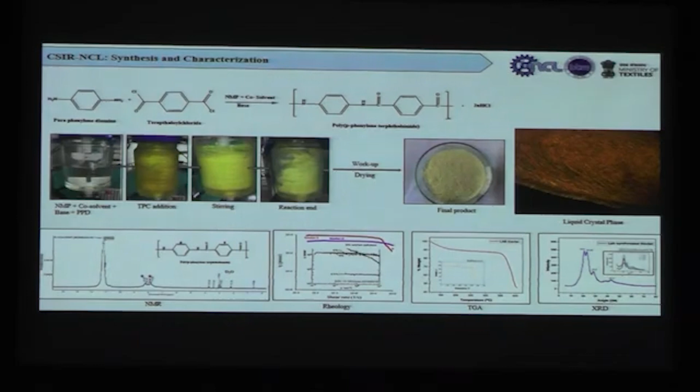So during the last 1 year, we have been able to develop the polymer, and one successful first attempt at spinning has also been demonstrated at BTRA.

So the next challenge after the polymer synthesis is the spinning. This is an infusible polymer. It does not melt, so melt spinning is not possible. It has to be done in solution state.

And as I mentioned, since it does not dissolve in normal organic solvents, this is dissolved in sulfuric acid, that too concentrated sulfuric acid and oleum. So the facilities that handle it also have to be of a grade which can handle sulfuric acid, like Hastelloy or steel of a particular grade.

So here this is our first or one or two attempts where we could dissolve the polymer at that concentration. At this concentration, which is like 19 weight percentage, it forms the lyotropic phase, meaning these are like rods going down a stream which are aligned in one direction. So that helps dissolve and then form a fiber.

So this is the spinning setup that BTRA has developed, and they were able to show the first proof of concept of spinning. A lot of optimization is remaining there. We saw the carbon facility here and realized the challenges we have to undergo to get the spinnable grade. But we have a couple more years, and we will also try to contact the original scientists who worked on this so that we don't reinvent the wheel. We try to gain speed because there are industries associated with this project, as that was the mandate of the NTTM - that from the beginning, industry has to be there, willing to take it up once we demonstrate 1 kg level. There are a couple of industries for that.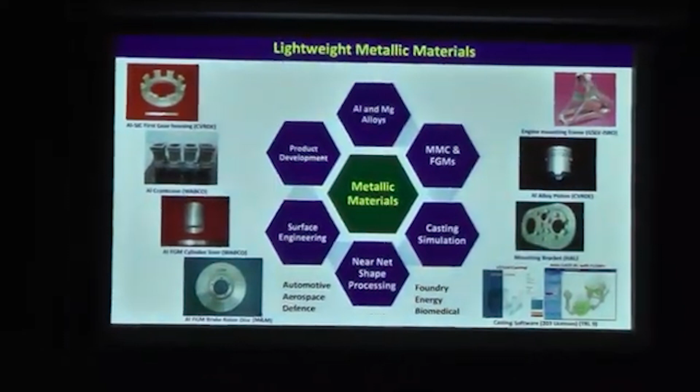In the area of lightweight materials, we are working mostly on aluminum and magnesium alloys, metal matrix composites and functionally graded materials, casting simulation, especially for the solidification processing of different castings used for varieties of sectors. The near net shape manufacturing process is used to create components based on the materials being developed, and includes squeeze casting, liquid metal infiltration process and so on. We also do surface engineering to improve the corrosion properties of the components we develop, normally the prototype components.

We also develop mostly on product development - if a user comes and tells us they want a product of a particular specification or material properties, first our duty is to develop the alloys, mostly lightweight alloys, then convert it into the product. The products mentioned here are mainly focused on automotive, aerospace, defense, foundry, energy and biomedical sectors. To start with, the first one is an engine mounting frame, made of aluminum 356 alloy, which is aluminum 7 silicon 0.35 magnesium with a few other alloying additions.

This was earlier being imported from the French. Then we were given the duty of indigenization, and we have done a few components - one such component is the engine mounting frame for the GSLV programs.

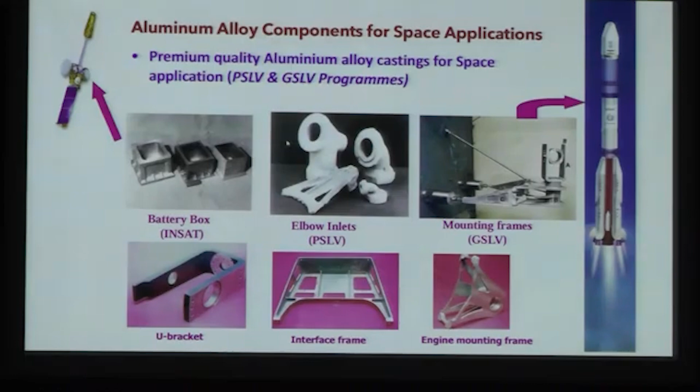We also work largely on metal matrix composites and functionally graded materials. MMCs are mostly aluminum composite systems, or any metallic composite system, with the introduction of silicon carbide, boron carbide, graphite, or other particles to improve the properties.

We have also been working on functionally graded systems, where a particular region of the component has an improvement in properties, based on specific property requirements in that region. We have worked on aluminum graphite for automobiles, connecting rods, functionally graded cylinder liners, and other components I had shown, and also on lightweight aluminum SiC armor plates, jointly with CVRD.

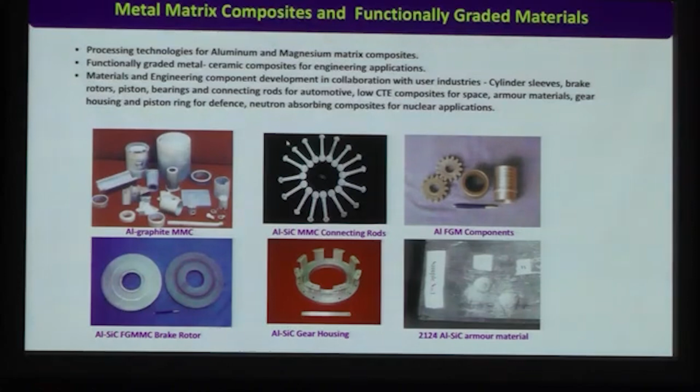Let's go into the fundamentals of this. I will show a couple of components.

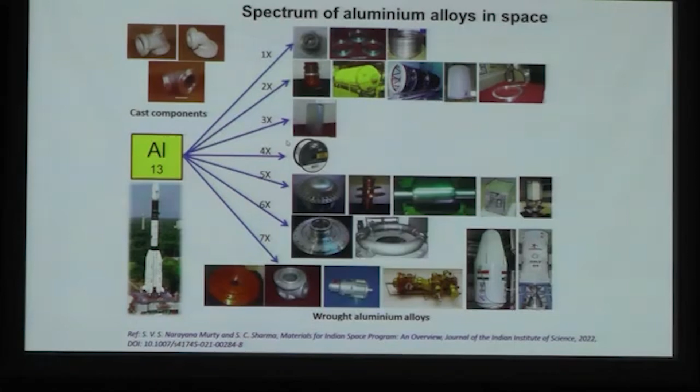These are some of the lightweight aluminum alloy components developed or used by Vikram Sarabhai Space Center, and we are also part of a few components where we have done the fundamental work for prototype development.

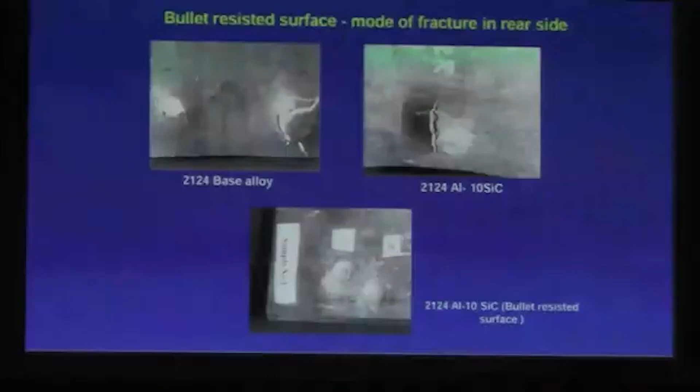We also work on neutron shielding materials with BARC, where the requirement is that the boron carbide particles have neutron shielding capacity. We incorporate this particle in the aluminum matrix, and these are made into panels, which are used as containers for transporting spent fuel from nuclear reactors to other sites, dumping sites or preserving sites. We develop some of these materials and supply them to BARC.

Another process we work on is liquid metal infiltration. Here we make a porous ceramic preform, which is placed in a preheated die in a hydraulic press. The required aluminum alloy is melted in a separate furnace, poured into the die, and infiltrated through the porous region of the preform to make the composite. This process is used to make the thermal management plate for our light combat aircraft.

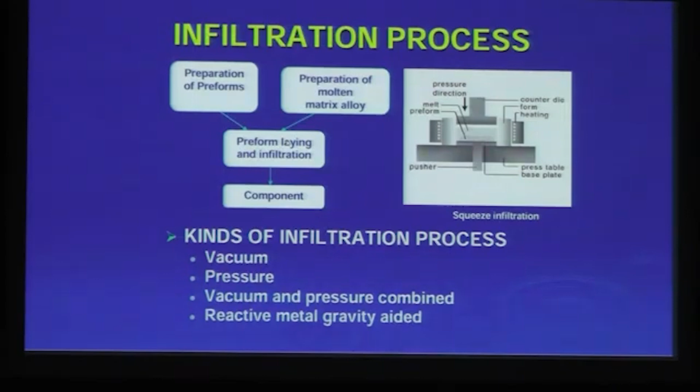We also have a pilot scale squeeze casting facility at CSIR NIIST, with a capacity of 340 tons, melt capacity of 100 kg, casting weight of 1 to 5 kg, product size up to 800 by 800, and thickness of 1.5. We collaborate with many industries, and this scroll compressor component is jointly developed with Atlas Copco, a Swedish company, to whom we supplied this product.

The requirement here is high wear resistance and high thermal conductivity. Based on the property requirement, we choose and develop the alloy first, optimize it, and then proceed. Now we are working on compressor heads and other components with WABCO and other industries; that program is currently ongoing.

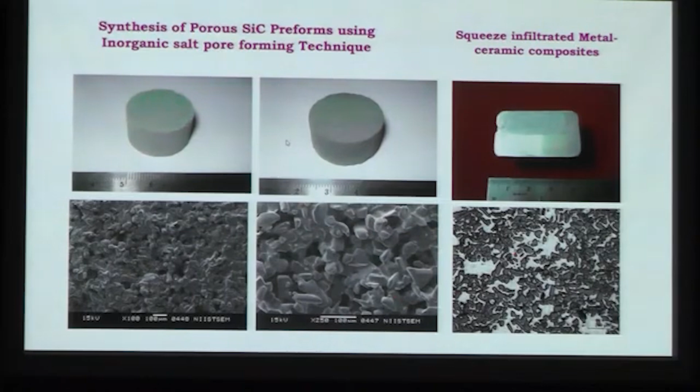This is the porous preform I mentioned. Once you pour the metal and squeeze infiltrate it, you get a composite like this, with a high volume fraction of silicon carbide particles infiltrated with liquid aluminum metal.

This concept can be used to make thermal management plates, which require low CTE and high thermal conductivity. Aluminum alloys have good thermal conductivity, and copper even better, but the problem is the CTE of these alloys is very high. For any electronic component, the CTE has to be below 10 ppm per degree C or per Kelvin.

So we used an aluminum-silicon-magnesium modified alloy with silicon carbide particles of the electronic grade green variety, since there are two varieties of silicon carbide particles. Initially 50 volume fraction was used with 50 micrometer average particle size, later 68 volume fraction, achieving a density of 2.9, hardness of 186 BHN as-cast and 210 in heat-treated condition, CTE of 9.73, and thermal conductivity of 176. By varying the volume fraction of SiC, we can tailor thermal conductivity up to 210 watts per meter Kelvin, and we achieved a compressive strength of 491 and modulus of 119 GPa.

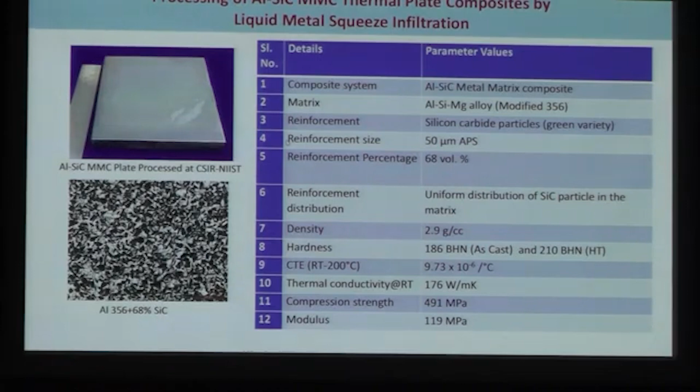This particular composite material is used to make the thermal management plate. This plate is currently being imported by the Aeronautical Development Agency and is being fabricated. This plate is used in the digital flight control computers of our LCA, and also finds application in other systems, even unmanned air vehicles and so on.

Normally this has the PCBs, printed circuit boards, which control the whole flight systems, and 4 PCBs are there, which on both sides we mount on these thermal management plates.

The requirement of this is mainly to conduct the heat and dissipate it, and each flight has this DFCC, and 4 plates are being used. The target properties achieved are: less than 3.01 gram per cc density, thermal conductivity greater than 150 watts per meter Kelvin, coefficient of thermal expansion of 5 to 10 ppm per degree C, and modulus greater than 80 GPa.

This is the imported one, and this is the indigenous one. We have transferred these products, almost 20 of them, to ADA, and now ADA in turn has given them to their fabricator, Bharat Electronics Limited in Bangalore, and they are going to put in the first component.

Initially, instead of completely replacing all 4, they will put 1 of our indigenous one and 3 of the imported one. In parallel, we are going for airworthiness certification with CEMILAC, and after that the real product will be put into use. Initially we will be making these components at NIIST Trivandrum, and then finally hand over to HAL or to other industries.